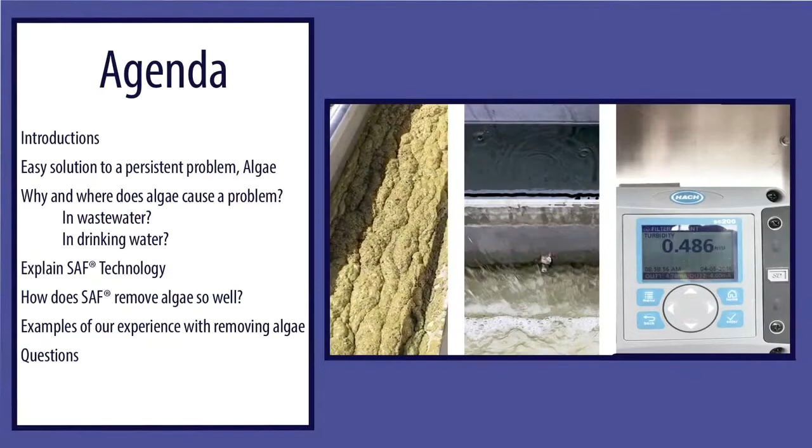We're going to do today a presentation on municipal algae and industrial biosolids, and I think that kind of goes back and forth over the next few days. So we look forward to hearing your questions. Again, we are very new at this. We'd much rather be face-to-face with you. It is likely we're going to miss something in this process. I would really appreciate you piping up and asking your questions that will prompt us to cover topics we may have overlooked. And with that, I'm going to turn this over to Jeff to introduce himself, and then we'll get on with the presentation.

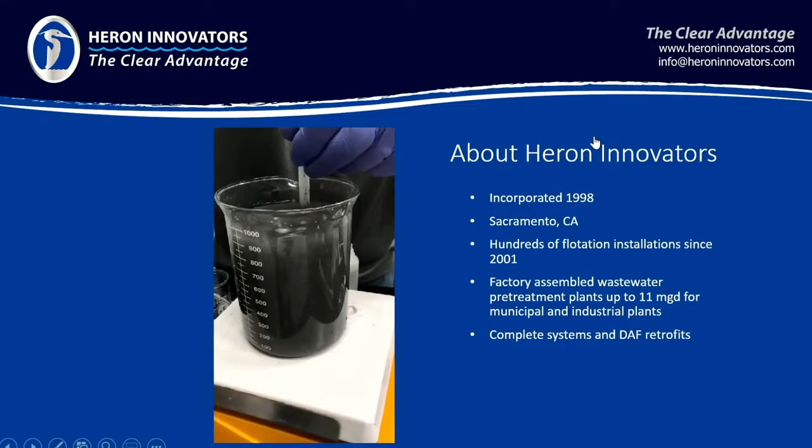And then I got together with John, gave him a call. We started talking about SAF, started introducing this to several of my clients. This jar test, I'm going to start this. That's a tube coming from a lab unit, and there's just a little bit of coagulant, a little bit of polymer in that jar, so we've got a pin floc. What that tube is doing is injecting a charged microbubble froth. As you can see, we've got a very high capture rate, a very fast rise rate, and a very stable float.

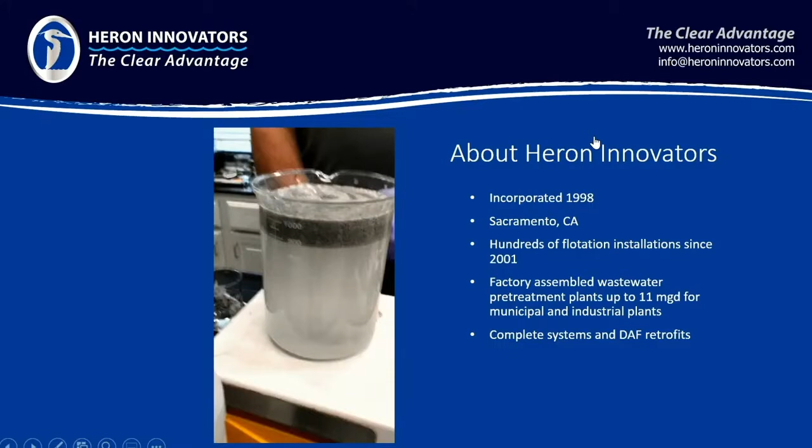That caught my attention, as well as the other people in the room, which happened to be the environmental manager from this company. So we went around and we started checking out SAF, and that company today has 9 SAF installations throughout their operations. So it all really caught our attention, and of course I ended up going to work for Heron Innovators a few years after that. I was that impressed with the technology, and I needed a job.

At an increased pressure, you can get more air into that water. When this stream re-enters the float cell, you've now exceeded saturation, so the little soda pop bubbles are going to come out of solution and work to float those flocculated solids to the surface, to be skimmed off and usually disposed of. That is basic dissolved air flotation. The technology's been around 100 years, and there are different designs on this.

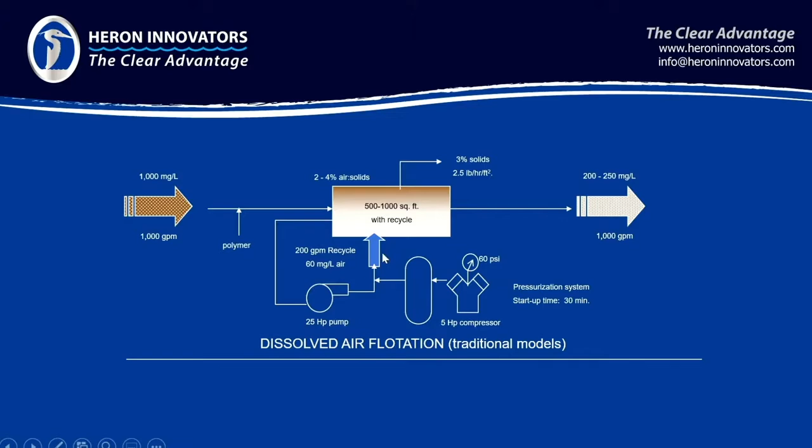There's other technologies called induced air and cavitation air and all that, but bottom line, it's simply putting bubbles in, which there's nothing really special about these bubbles. SAF is really entirely different. In fact, there's no dissolved air involved with SAF.

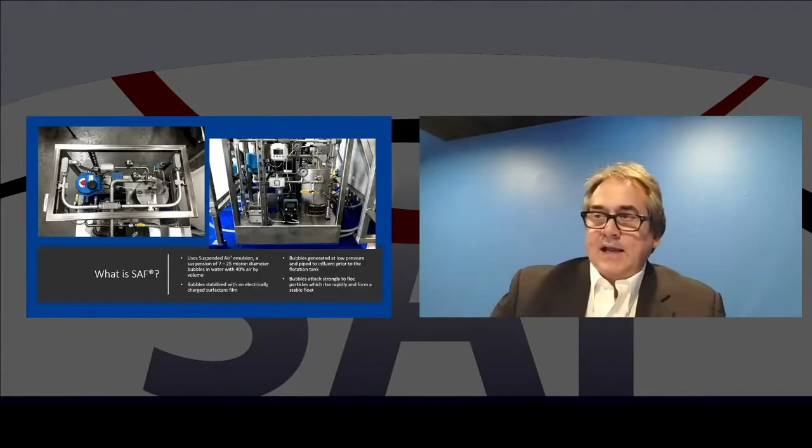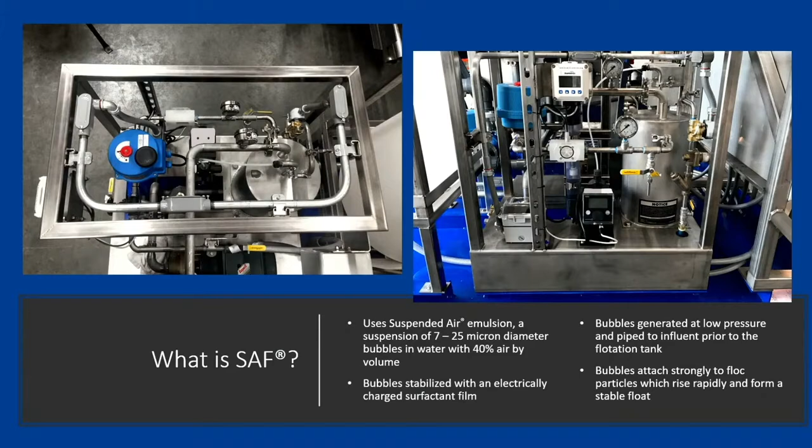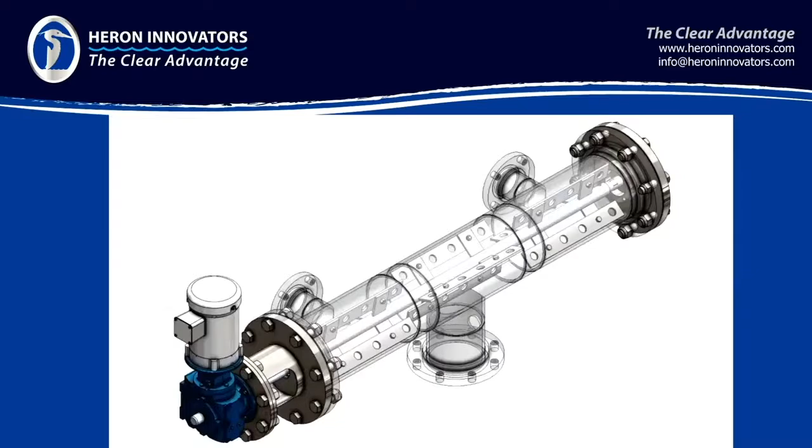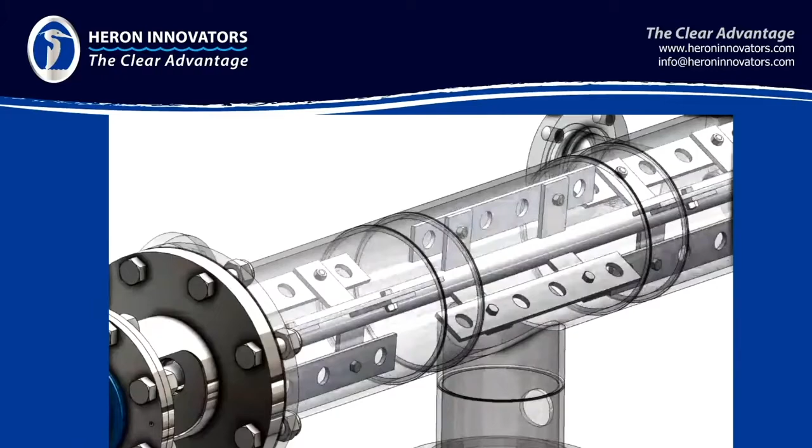In fact, it's stirred in with a device that looks like this. So the froth is injected here, influent coming here, and we've got these paddles, and these paddles are only turning maybe 10, 15 RPM. We're going to get a very gentle stirring in of that froth, just enough to get a good mix, but not shear the floc that was created with the chemistry upstream.

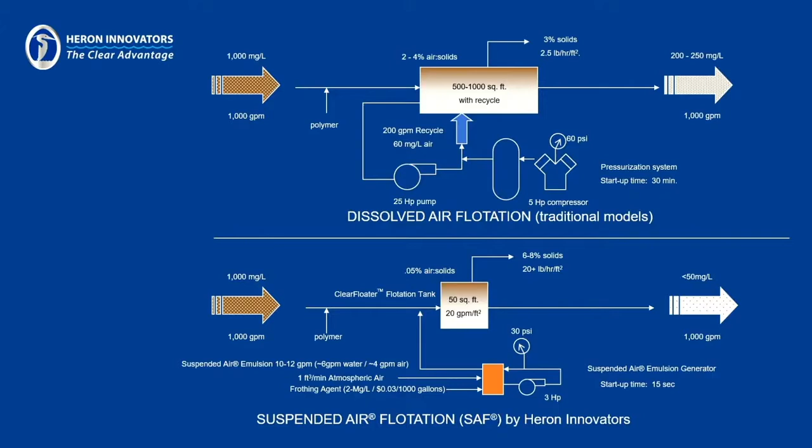And so beyond that, what makes SAF such an incredible separation is the mechanics of it. At first glance, you would think this just looks like another flotation technology, but when you really get into the mechanics, how these bubbles work, it's very different. So John, I'm going to kick this back to you a little bit—can you explain to us why those bubbles have such an affinity for the solids?

Yeah, so we make something in our SAF generators called an aphron. Aphrons were patented in the 70s by Dr. Felix Sebba and 3 of his partners. I think that was the University of Virginia—they keep saying South Africa, I'm not sure where that actually happened, but there was a patent in the 70s. And the issue at that point was these bubbles weren't able to scale past the lab unit, and that was our accomplishment.

But the bubbles have an advantage over a DAF bubble in that they have a surfactant sheath on the outside of it, and that sheath provides us with surface tension advantages over a DAF bubble. We learned how to harvest the 7 to 25 micron bubbles, but really it's that sheath on the bubble that gives us a surface tension advantage.

And that surface tension advantage gives us, along with the charge advantage—we have an anionic or cationic surfactant, we have a charge, some electrostatic affinity—about 1,000 times the affinity for a particle in solution, compared to a naked bubble that a DAF or other IAF may generate. That attachment does 2 things, which we're going to talk about a little bit later, but that small bubble charge and getting so much air on the particle does 2 things.

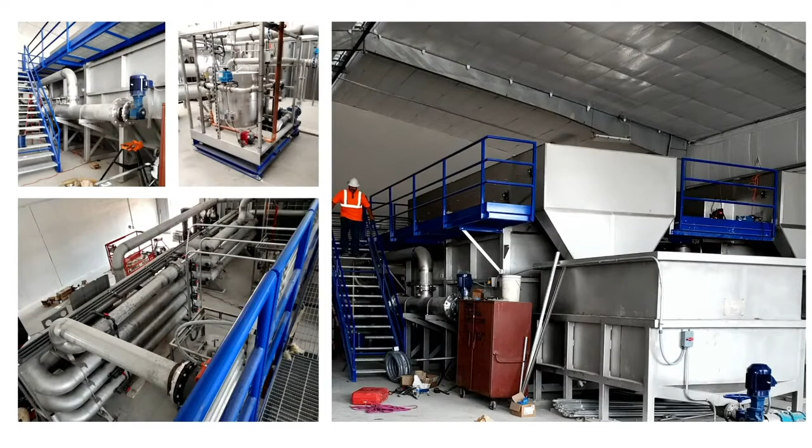Okay, so on the upper left-hand corner of the slide you're looking at what we call a floc mixer. It's that pipe there that's kind of going along the side of what we call our float cell or ClearFloater. That is to mix in the microfroth created by the SAF generator, which is to the right of it. I'm not ready to move yet.

The reason why we need that floc mixer is, in a DAF environment where you're recycling 15, 20, 30% of the water, that water is going to mix. We're normally got a recycle stream of 1% or less, and I need to mix that quickly without disrupting the floc. And that's why we have a floc mixer.

One of the advances in the last several years is that the floc mixer used to be in the tank, and now it's on the exterior of the tank. We find a much more uniform particle distribution size, much more consistent float, by having some control over the mix energy before it goes into the float cell.

So the froth generator is making the charged microbubble froth, and then it's being injected. I believe on this unit, it's being injected right here, and then it's stirred in right here before it goes in. So there's really no recirculation after it goes into the flotation cell. Is that correct? That's correct.

So when I say recycle water, it's actually normally some sort of fresh water source. It's normally just a few gallons a minute. And it does contribute to the loading on the float cell, but nominally, usually less than 1% of the flow.

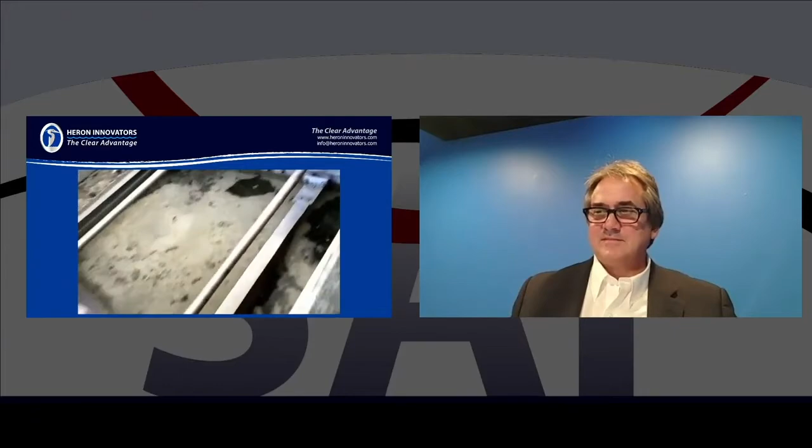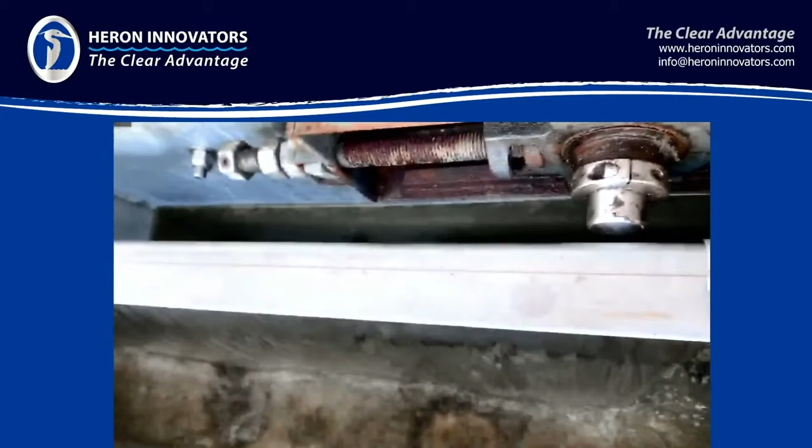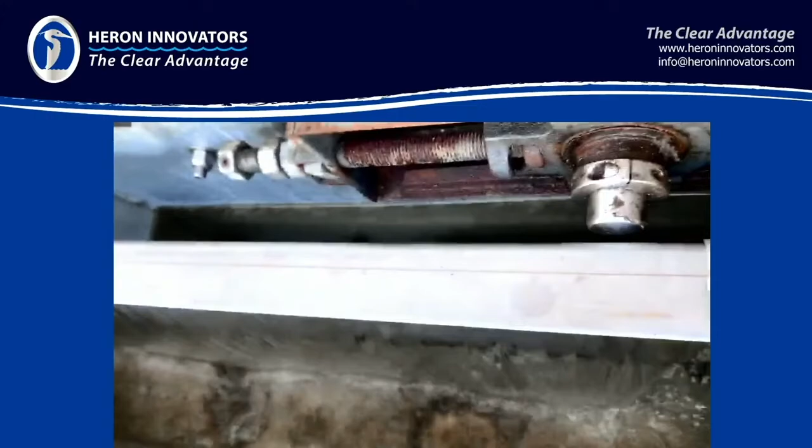So this is algae removal. You saw in the first part of the video where we had the solids coming up and we were skimming them off, and then the clarity of the water. We have data from normal wastewater where you might see somewhere between 60 and 300 parts per million, which is usually what they make us warranty, so we'll use 300. I've never seen much above 100, but from 60 to 300 parts per million, we consistently get between 0.2 and 0.8 NTU water on the discharge side.

Remember what I said about Title 22, where the filter needed to be able to make water better than 2 NTU. We are creating water for that filter at 0.2 to 0.8 NTU. So the filter just becomes kind of a stopgap, and it doesn't have the loading it normally might see from other pretreatment techniques. With that, we have long cycle times, a lot less load, and a lot less problems with the filter, and a lot less blinding.

We've got a chart up right now showing several installations where we're making Title 22 water with the SAF. Why don't you talk about a few of those? Well, the data on this screen, the blue dots, is from 2006, our first trial on algae. We were getting about 100 NTU water into us, and we were treating it down to anywhere between about 2 and 7 NTU water, which we'd consider terrible today.

But that was enough to put in that installation, Graton Community Services District. Today, that same unit, depending on how clean they want to make it, can turn the polymer down or up, but they keep it running right around 1 NTU and can easily achieve half that. They actually achieved that half NTU for several years running, and now they're playing with other polymers, trying to save costs, and letting performance fall off to just under 1 NTU.

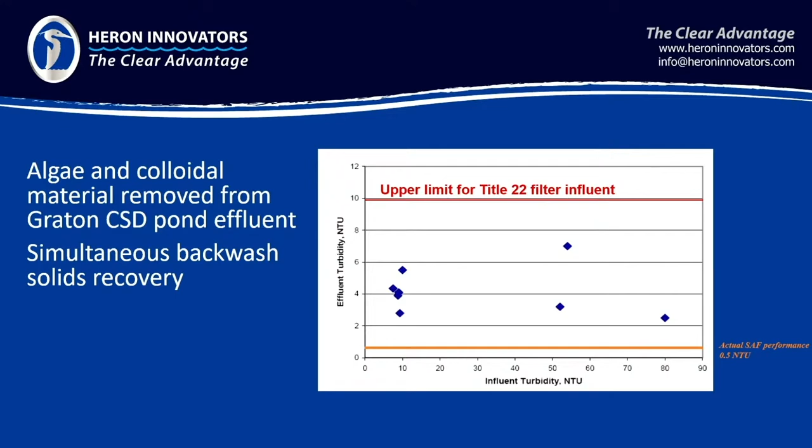We have another installation at Pleasant Valley State Prison, and that unit gets consistently between 0.2 and 0.8 NTU, and the data I've seen for about 2 years now has been consistently at about 0.5 NTU.

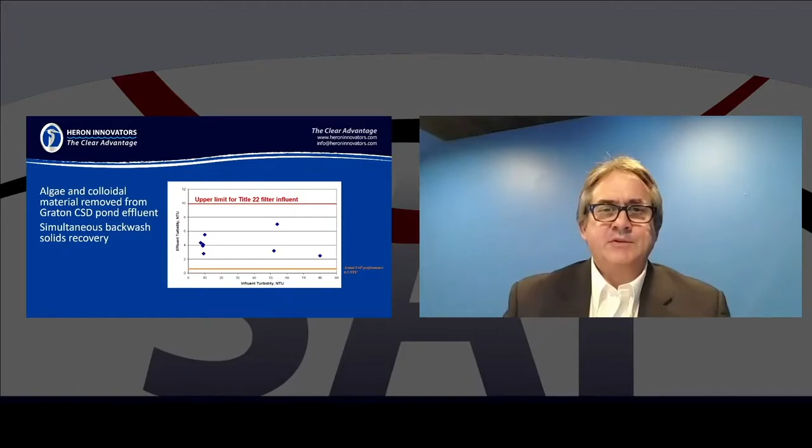So I'm often at conferences, and I'm sure you are as well, John, where there are presentations given on algae, algicide, talking about different strains of algae. It seems like DAF is a really well-kept secret. In fact, I often want to stand up sometimes in those meetings and say, we've got a solution. Let's talk pragmatically, where does this fit in a municipal plant?

Well, right now, it seems unlikely that the regulators, the regional board, would approve a flotation technology as a Title 22 approved answer. Everyone's got a comfort level with the filter, and it provides a backstop to performance for any kind of upset condition that might eventually come about. So we are a pre-treatment to that Title 22 filter.

So in normal installations, we are downstream of some sort of retention pond that has already treated the municipal water and is waiting for distribution. That retention pond grows algae just by virtue of the fact that it has a little bit of BOD left in it, a little bit of nutrients in it, and it sees a lot of sunlight. It's in that pre-treatment step that we really perform, and we really outperform all our competition, to the point where most operators find it easy to treat algae now, when it used to be a very difficult process.